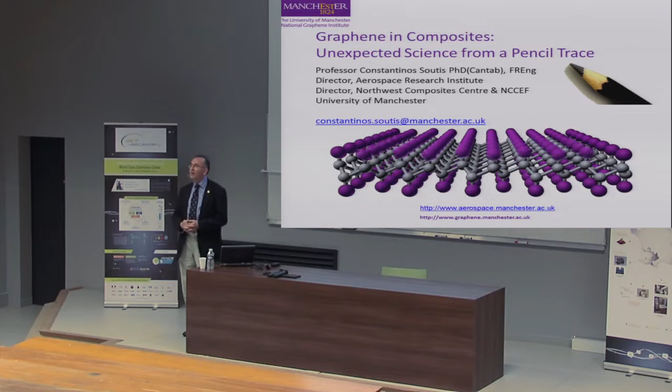Before I talk about graphene, I would say a few things about the talk outline. I'll say a few things about the University of Manchester, who we are, and then talk about graphene at Manchester, and possible applications of graphene in the aerospace sector, but also in other sectors outside the aerospace industry. If I talk too fast, you can tell me to slow down. You can interrupt during the presentation, or we can take questions at the end of the seminar.

We are the largest single-site university in the UK, with a history going back to 1824. Some key facts: we have about 40,000 students, 10,000 staff, and 25 Nobel Prizes over the history of the university. It is the birthplace of the Industrial Revolution, and the atom was split at the University of Manchester, not Cambridge, as they claim. The first programmable computer was developed at the University of Manchester. Currently, eight of current world leaders, 4 prime ministers and 4 presidents, are graduates of the University of Manchester. Only Oxford has 9.

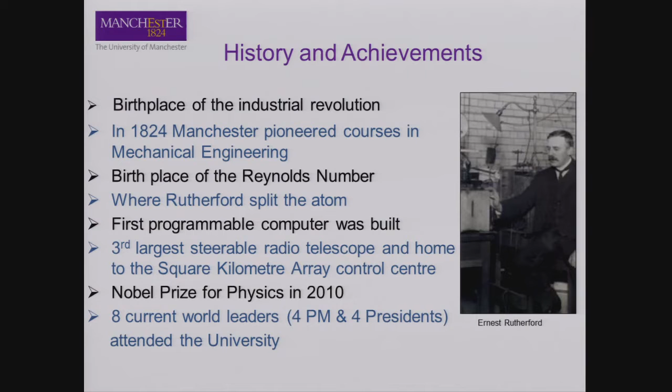Graphene is another thing that has been made in Manchester. It is the largest single graphene research group with over 200 researchers, and a total income over the last 4 years of 170 million pounds. You can convert that into euros. It brings together a very multidisciplinary institute of mathematicians, physicists, material scientists, and engineers.

The National Graphene Institute opened in March 2015, and as I said earlier, it's an opportunity to bring different communities under one umbrella, to tackle problems that are multidisciplinary by their nature. Aerospace is one of those multidisciplinary areas where you need the chemist to look at the polymer, the physicist to understand the microstructures, the material scientist, but at the end of the day, the engineer who is going to build and identify applications where those new material systems can be really exploited.

So the National Graphene Institute is led by academics, and it provides an opportunity to demonstrate new concepts, new applications, demonstrate the potential of graphene by producing new products, and assist in the development of low-cost and scalable manufacturing methods for high-quality graphene. Because today, you might go on Google and say, I would like to order 1 kilogram of graphene. The big question remains how pure that graphene is. What do you know about its purity?

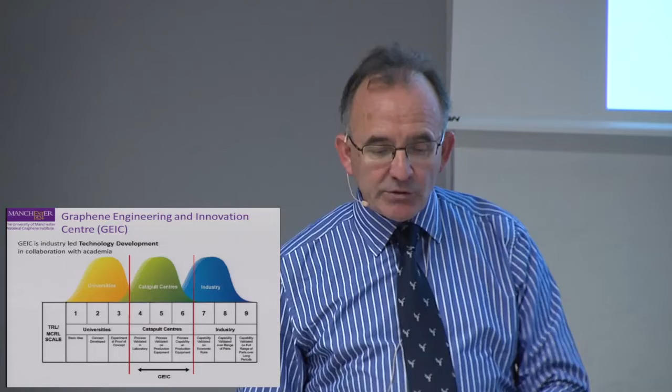In addition to the NGI, we have the Graphene Engineering and Innovation Center, which is another 100 million euros activity, led by industry in collaboration with academics. In this case, the focus is at higher TRLs, so we're talking about 4 to 6, which is probably similar to the TRLs that you're examining under the IRT.

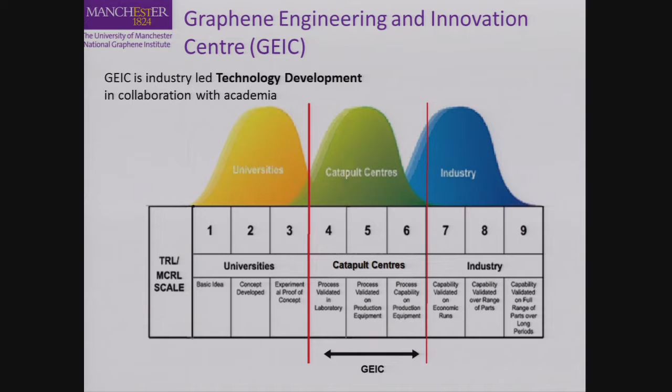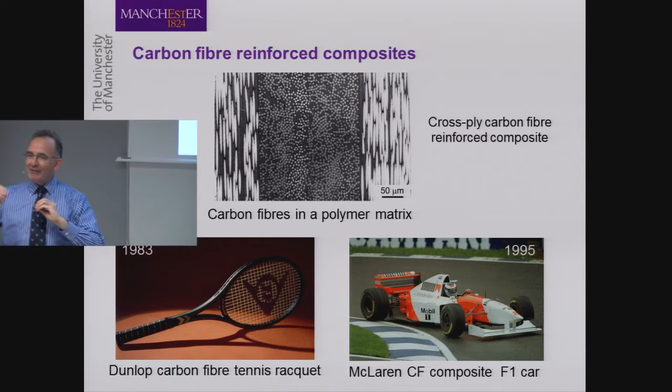We can see some of the earlier applications of carbon fiber reinforced plastics go back to 1983 with the tennis racket, and a bit later on in 1995 with the McLaren Formula One car. Although carbon fiber epoxy systems have been developed in the late 60s, we've seen the first applications appearing in the early 80s. Airbus introduced composites in their Airbus A300 in the late 70s, early 80s in the form of control surfaces, mainly glass reinforced plastic. But composites became more popular in the early 80s onwards. So you can imagine now, if we bring in graphene into composites, it's going to take a bit longer to identify those applications.

If we look at the application of composite materials in the Airbus aircraft, we've seen that the usage of the material grew exponentially, where we've reached today in the Airbus A350, more than 50% of the structure is made out of carbon fiber reinforced plastics. The question is, have we reached saturation? Can we build the whole aircraft out of carbon fiber reinforced plastic? And what materials will be used in the next generation of Airbus or Boeing aircraft?

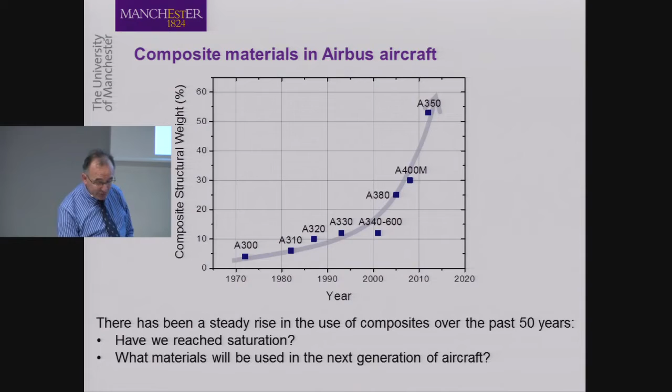We're trying to identify ways to see if graphene can be used in combination with traditional carbon fiber epoxy systems to give us superior properties. Because when we build with composites, we benefit from increased stiffness, strength, and reduced weight, which you need to have a light structure to fly.

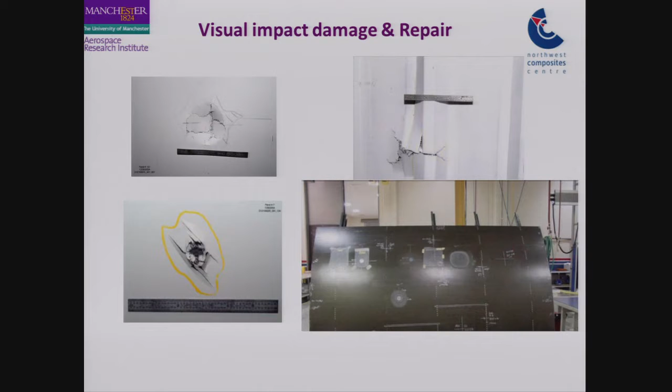But they do get damaged. You drop things, and they behave in a more brittle manner. In this case, we don't need a non-destructive evaluation technique, we don't need an SHM system, because with the naked eye we can see the damage. The challenge is how to fix it, how to repair it. That remains a big challenge for the operator.

But from the graphene point of view, can we use graphene to make our existing composites more resistant to impact damage? Can we use graphene to make current carbon epoxy systems more damage resistant? That would be good, because if we can do that, then we don't have to worry about repairs.

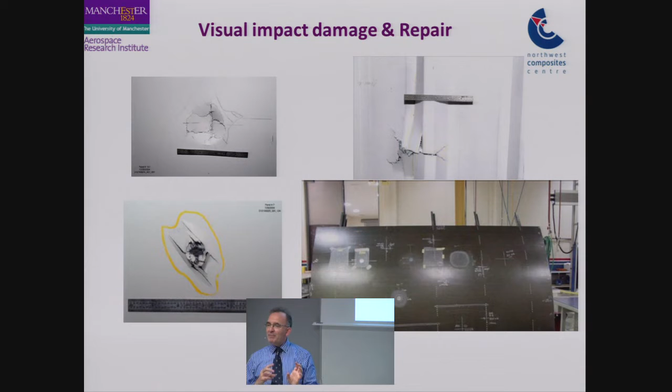Performing a bonded repair in a primary structure remains a big challenge, because the EASA and the FAA don't certify bonded repairs. So if you have damage in the primary structure, you have to drill holes, and your patch has to be riveted.

But what is the problem with rivets? We have to drill the composite. By drilling, we cut fibers, and then we go back to stress concentration factors that we have to deal with in metallic structures. And when we say composites do not fatigue, we know very well now that once we have holes and rivets, fatigue can become an issue, especially as we've moved to an era where our composite structures are becoming primary structures and are heavily loaded, in comparison to composites in the early 80s or late 70s, when they were used mainly as secondary structures.

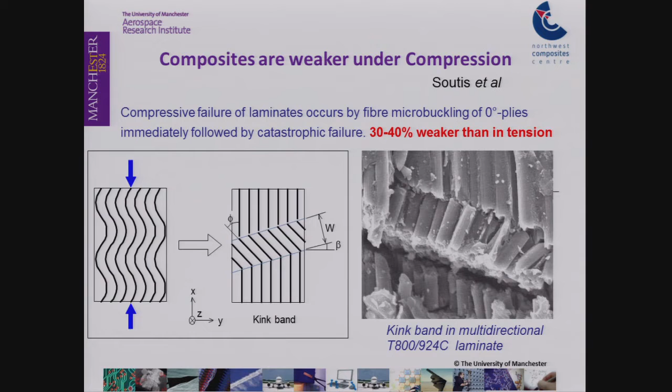And of course, the other big problem we currently have with carbon epoxy systems is that when loaded in compression, the compressive strength is only 60-70% of the equivalent tensile strength. The reason behind it is a huge mismatch in thermal properties between the carbon fiber and the polymer. The coefficient of thermal expansion of your resin is about 70 to 80 microstrains per degree Celsius, while the coefficient of thermal expansion of your carbon fiber is -5 microstrains per degree Celsius.

So during the curing process, you develop thermal strains high enough to distort your fibers. Your carbon fiber, with a diameter in the region of 6 micrometers, becomes wavy. When the structure is loaded in tension, the wavy fibers become straight. But when loaded in compression, the wavy fibers fail by fiber microbuckling, a fiber instability failure mode that takes place at the fiber level. Although the structural engineer has designed the structure to avoid Euler buckling, you can still fail in the form of fiber microbuckling, which reduces the strength by up to 40%.

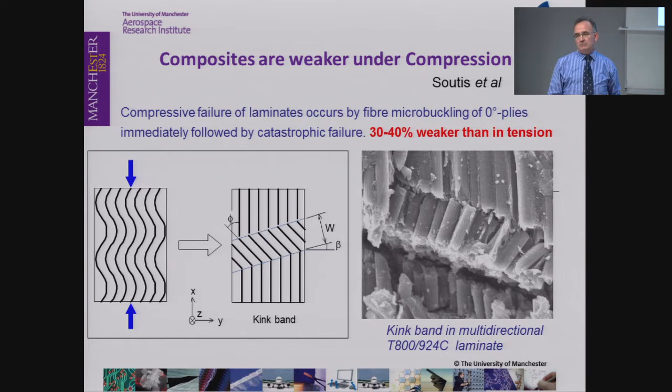So we've seen a potential for graphene to be used in carbon epoxy systems, where we can improve strength, stiffness, and toughness. We can make the composite more damage resistant. And when damage eventually does happen, we can probably tolerate that damage, so we can design more damage tolerant structures.

And moving away from just mechanical properties, can we use graphene to introduce electrical functionality? Can we increase the electrical conductivity of the carbon epoxy system so that when our aircraft is exposed to a lightning strike, it doesn't get damaged, and behaves like a metallic airframe? Can we do that? Or can we use graphene to improve the thermal conductivity of the composite?

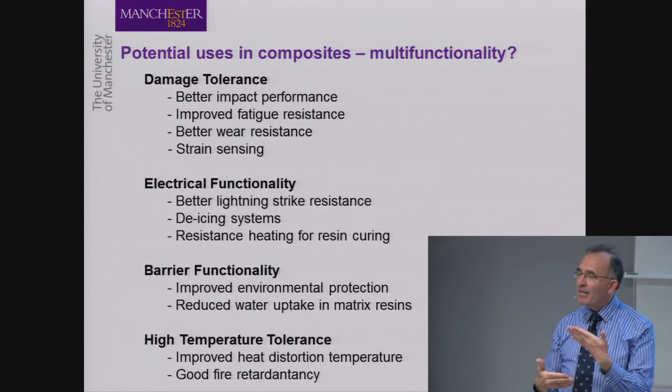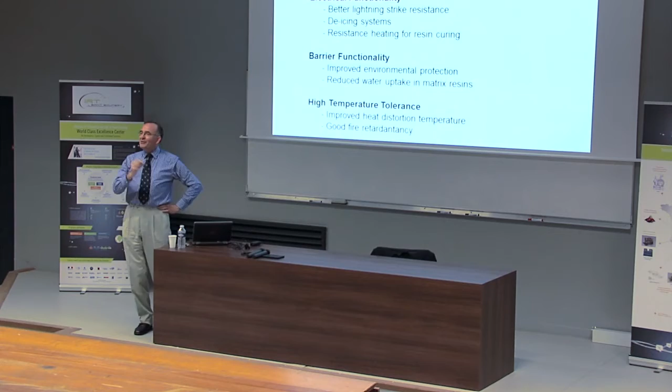So as you can see, there are options where graphene can introduce some kind of multifunctionality in our carbon epoxy systems, which are used extensively by the aircraft, sports, and automotive industries. But of course, the aircraft industry remains the sector that actually invests and drives technology. They set all the challenges we face today. Because after all, yes, Formula One uses carbon fiber reinforced plastic, but if you go to Formula One to ask for research funding, they're not interested in research. They would like to use existing research.

But then, of course, the question becomes, what is graphene? What do we know about graphene? And how new is this super material?

Graphene is defined as a two-dimensional material. It's an allotrope of carbon, one atom thick, which is 0.33 nanometers in thickness. It's accepted that up to 10 layers of graphene is still considered graphene. But then, of course, we are familiar with 0D, the bucky balls. Carbon nanotubes are one-dimensional graphene. And the three-dimensional product, of course, is graphite, from which we can extract and produce graphene.

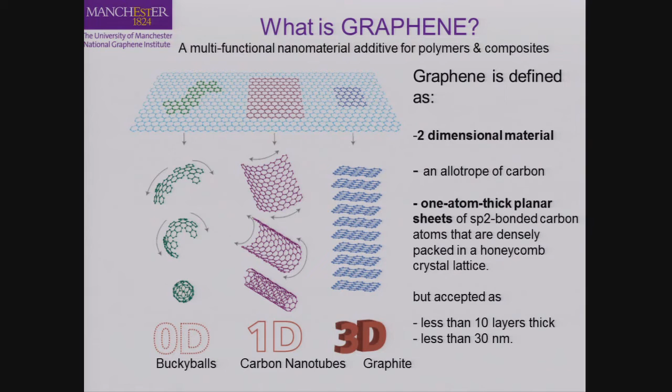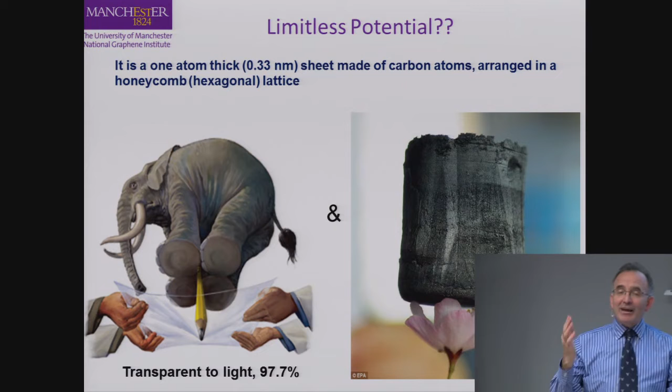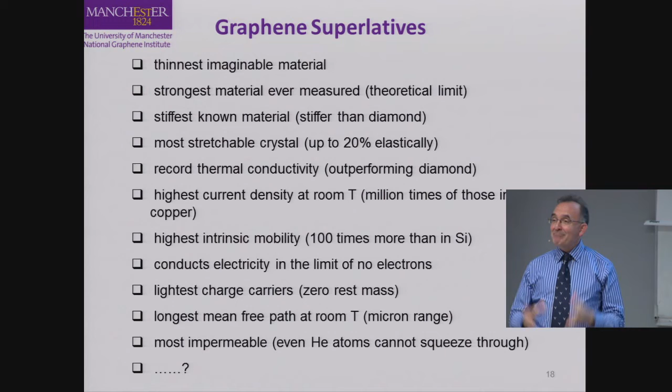And of course, people talk about the limitless potential, the high strength, the super light weight. It's 97.7% transparent. In addition to super stiff, super strong, super light, there is another huge list of graphene superlatives, I call them, that give you the impression they can solve all the problems we face today - thermal conductivity, electrical conductivity, and so on and so forth. This is a very long list of properties that define this material as a super material.

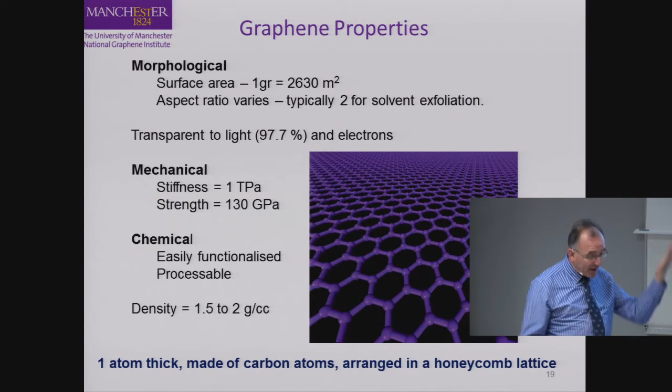And if we look at some properties like stiffness, it's in the region of 1 terapascal. And if we look at strength, it's 130 gigapascals. While if you compare the stiffness of currently used carbon fiber systems, the stiffness of carbon fiber is in the region of 250, 300 gigapascals, while here we're talking about 1,000 plus gigapascals. And if we look at the strength, it's in the region of 2.53 gigapascals, while here we're talking about the strength of 130 gigapascals.

How can we measure those properties? It's not easy. First of all, you need to have the graphene flake. Second, you need to develop the test methods and the measuring equipment, the strain gauges, to measure stress and strain in order to calculate stiffness and to capture the entire stress-strain response.

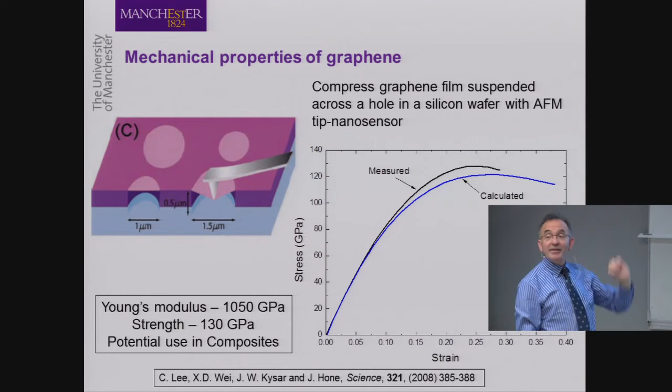We can see here an example where you have this cantilever beam with an AFM tip nanosensor to measure the strain developed on that graphene flake. And from the stress-strain curve, we can see that we have a very high strength of 130 gigapascals and a Young's modulus of 1,050 gigapascals.

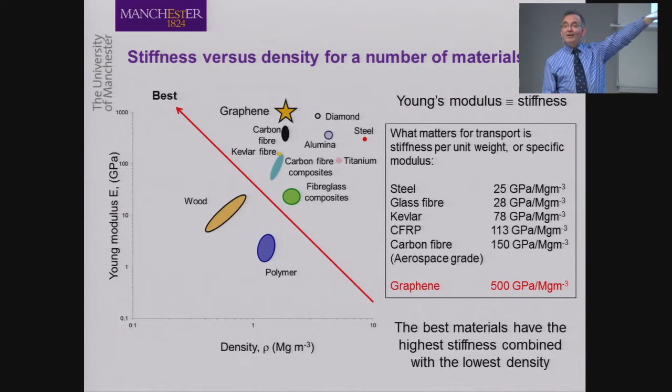And then when we look at the comparison of graphene with other traditional materials, we can see that graphene is at the top left corner with very high stiffness and very low density. So you can see where the traditional carbon fiber is much lower. And of course, if we look at steel, it's got a specific stiffness of 25 units compared to 500 units for the graphene. So it is a super material.

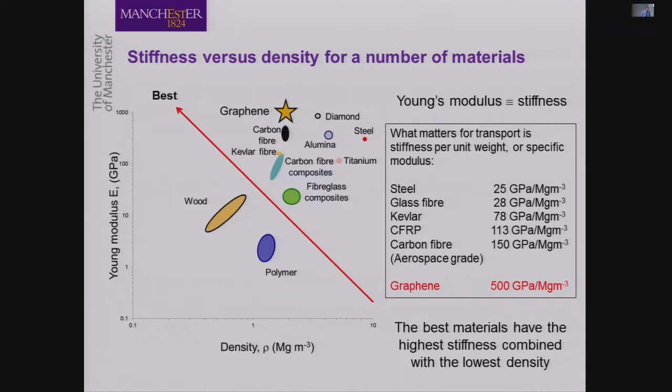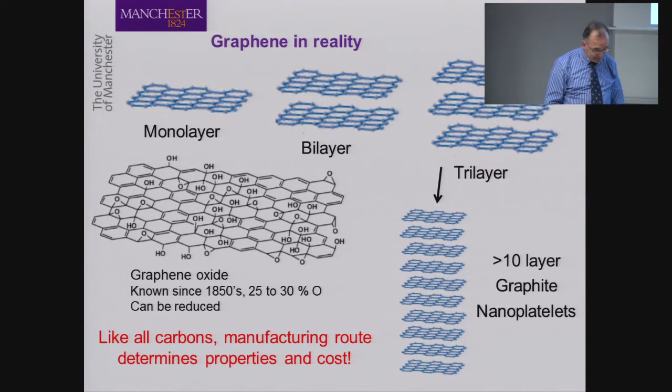And as we said at the beginning of the talk, there is graphene and its derivatives. So we have graphene here produced with CVD, Chemical Vapour Deposition. Then we have graphite, reduced graphene oxide, graphene oxide, and graphite oxide. So when you go out to buy some graphene, what do you buy? Do you buy pure graphene, or do they give you some graphene oxide? Or they might give you graphite oxide, which is going to have completely different behavior and different properties from the pure graphene.

Of course, the next challenge we have is how do we make graphene? One way to make graphene is we can start with a top-down method where we have a block of graphite and we try to break away layers of graphene. Or we can go from bottom up, where we can build graphene atom by atom. And there are these two different techniques that can give you graphene.

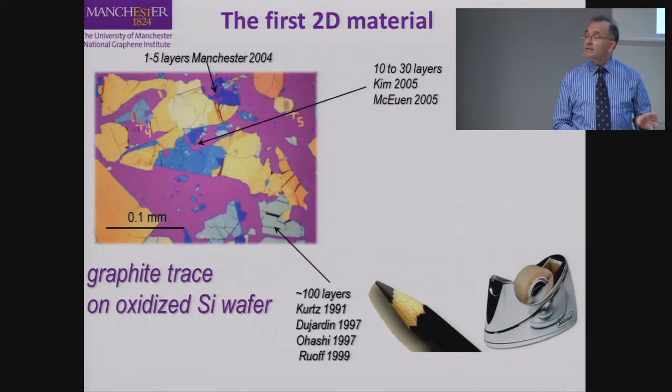If we look at this graphite trace on the oxidized silicon wafer, they went to one small spot, a tiny spot - that's a small spot there, probably a pencil spot. And then if you magnify that, there you are, that's your first flake. That's the first 2D material, which was demonstrated by the colleagues at the University of Manchester.

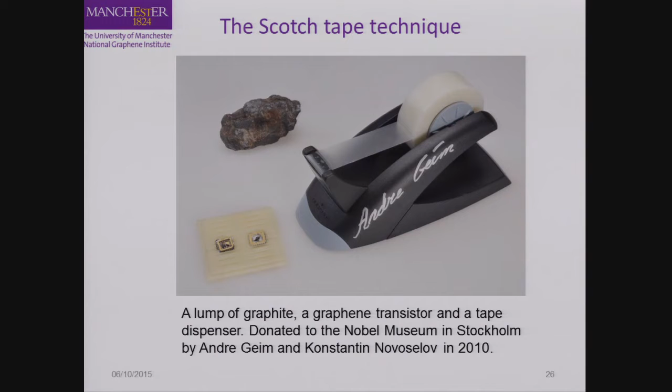And of course, you can produce your own graphene using the Scotch tape exfoliation technique. So next time you go to Stockholm, at the museum, you're going to see a lump of graphite, the Scotch tape, and also they have donated a graphene transistor. They're on display at the Nobel Museum in Stockholm.

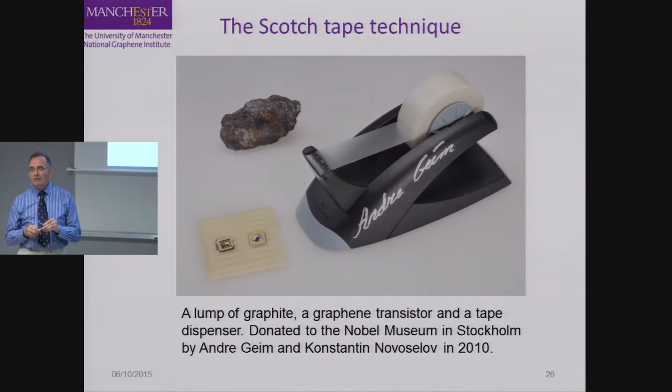I have some pencils here, of course, from Manchester that you can use with your own Scotch tape to produce your own graphene. But my pencil is more multifunctional, because it can also fly. So I can give one to your CEO there - you can catch that, there you are. Enjoy flying.

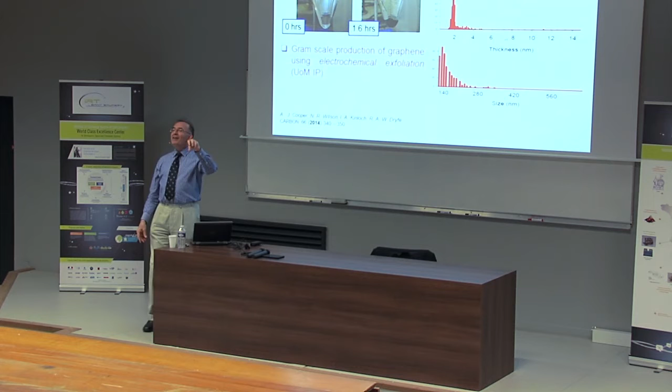So if we go now to graphene production, we've seen that one method is electrochemical exfoliation, not as simple as the Scotch tape, of course, but more complicated. The University of Manchester has the IP for this electrochemical exfoliation, where we can produce pure graphene with those super properties we've seen earlier.

The problem we have is that we can produce only a few grams, because after all we're a university, we're not an industry. And this is where the National Graphene Institute and the Engineering Graphene Centre can work closely with industry and take those concepts, and probably next time they can give us, instead of a few grams, a few kilograms.

And at the moment, we produce few graphene flakes. They are few layers thick, small sizes - you can see the distribution of size, anything between 140 to 300 nanometers, and the thickness around 2 nanometers or less, or slightly more, a few layers.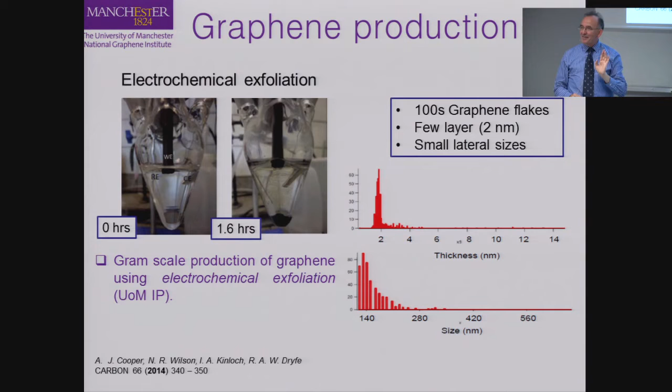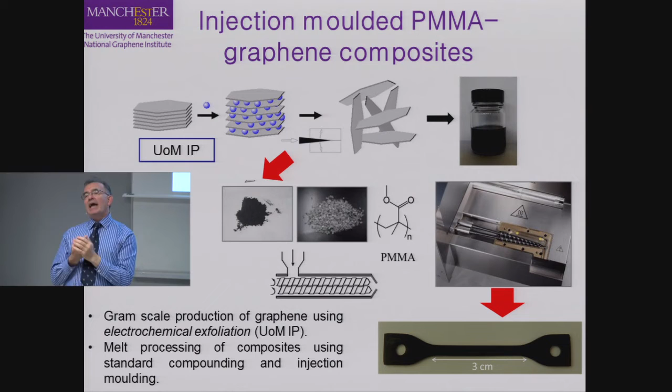And then what can you do with those grams of graphene? As we said earlier, we can modify plastics. In this case, we can modify a thermoplastic with the ultimate aim to improve strength, stiffness, toughness. But then again, I wouldn't waste my graphene to improve the mechanical properties of PMMA - why would I do that? Even if I double or triple or quadruple my stiffness, I still can't really build an aircraft with that kind of material.

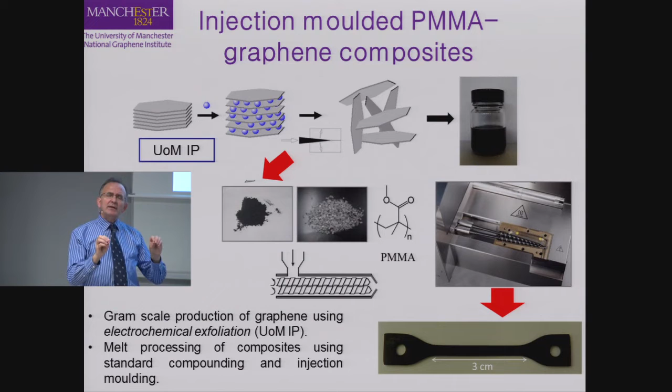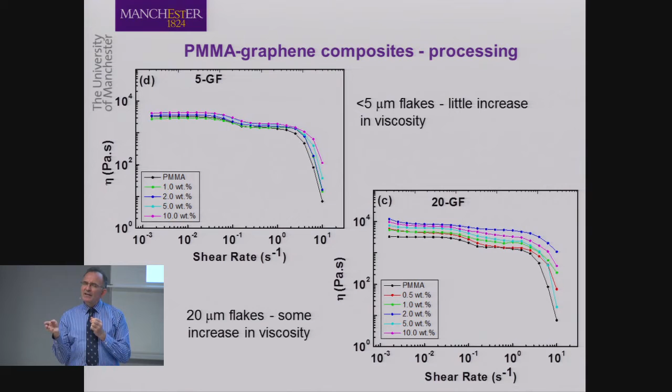But it's to demonstrate how you can mix it, because the mixing and distribution of graphene has a huge impact on the properties you will achieve in your final product. And also you want to demonstrate that as you increase the amount of graphene, you don't alter viscosity.

We can see in the top left graph, if we have 5 micrometer graphene flakes, as we increase the amount of graphene from 1% to 10% by weight, we don't alter the viscosity. If our graphene is of a larger size, 20 microns, then we can see as you increase the amount of graphene in your polymer, you change the viscosity, which means it's going to have an effect on your manufacturing process.

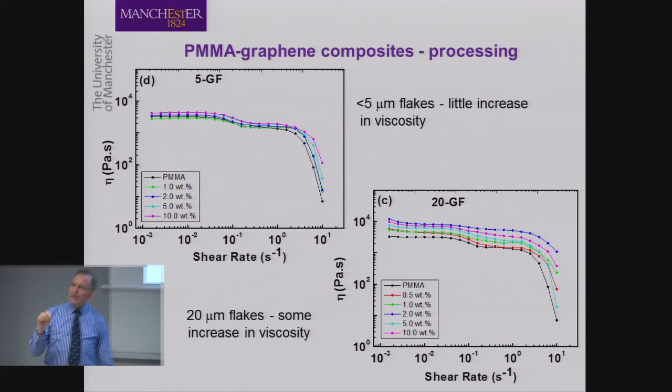And then if your thermoplastic is reinforced with continuous fibers, maybe the effect or benefit you get from graphene is not really felt as much. So these are critical issues on how we can mix and disperse the graphene uniformly in our matrix.

And if we look at the Young's modulus, we can see that from 2.4 gigapascals, we have increased it. In percentage terms, it's a very high increase, but in actual terms, what am I going to do with 3 gigapascals stiffness? Maybe people in the electronics industry or other sectors will say this is a very significant increase and I will benefit from that. But from the aerospace application, I cannot build anything with that.

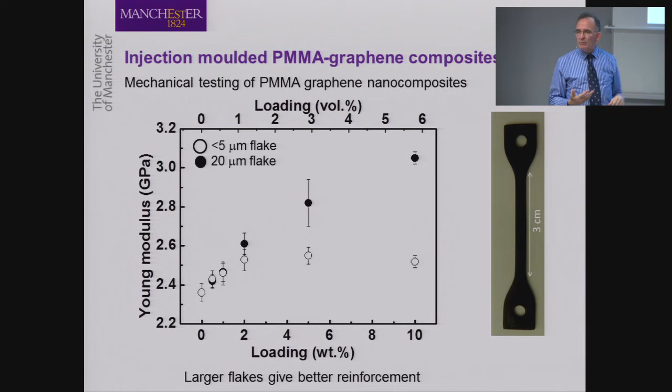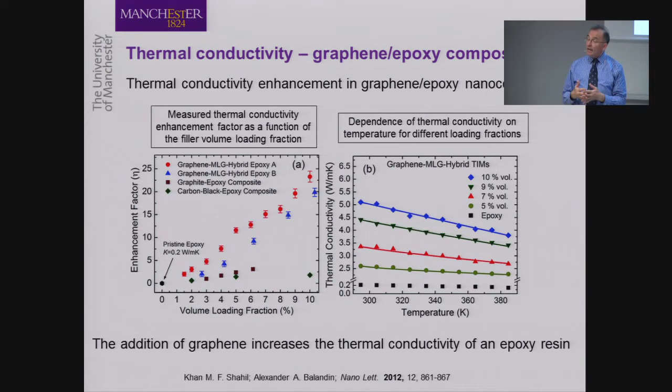Now, if we look at other properties outside mechanical response and behavior, if we look at thermal conductivity, we're going to see that we can increase the thermal conductivity dramatically. That is beneficial, especially in the aircraft industry, where we would like to do something about heat management and how we can dissipate heat quickly in a non-metallic structure. So there we can see straight away a huge benefit by modifying the thermal properties of our component. And you need appropriate equipment to make those measurements for thermal conductivity.

The other significant property we mentioned at the beginning of the talk is electrical conductivity. If we look at thermosets or thermoplastics, they are not electrically conductive - they resist electrical flow. But if we introduce 2% by volume graphene, then we can see that the electrical conductivity increases by 12 orders.

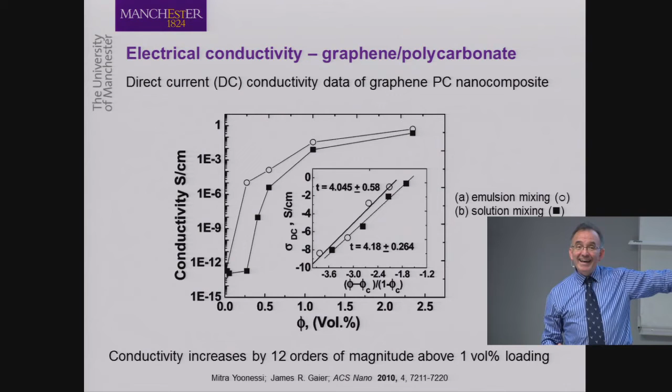That is a significant improvement. Of course, someone might say the electrical conductivity of copper is 10 to the power of 7 Siemens per meter, which then again, I'm far, far away from that conductivity of copper. Now, the conductivity of the pure graphene flake on its own is similar to copper, but when you mix it with the polymer, obviously it's much lower, but still 12 orders higher than the monolithic polymer.

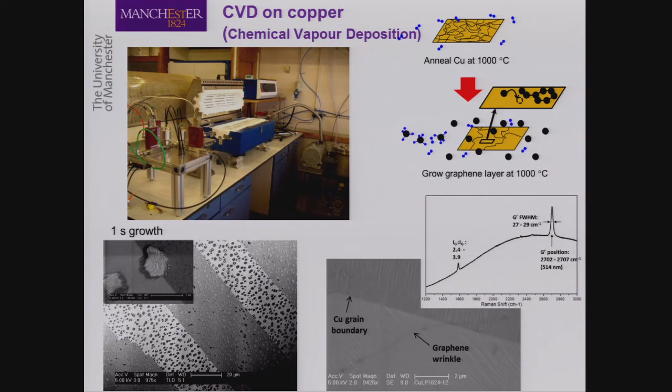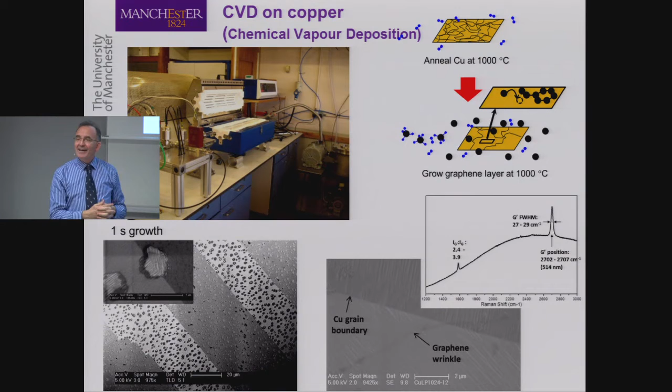Another way of producing graphene is by chemical vapor deposition. We can see there, atom by atom, we create the layers of graphene. You grow graphene on your copper substrate at elevated temperatures of about 1,000 degrees Celsius. Again, there is an IP behind this, because it's not as simplified as it appears on the screen.

If you go at the small scale level, then with those graphene flakes, you can develop strain gauges. So you have straight away an application of graphene strain gauges for your applications in microelectronics and many other industries, where when you measure strains, they are in few microstrains rather than the thousands of microstrains that we experience in structural applications in the aerospace.

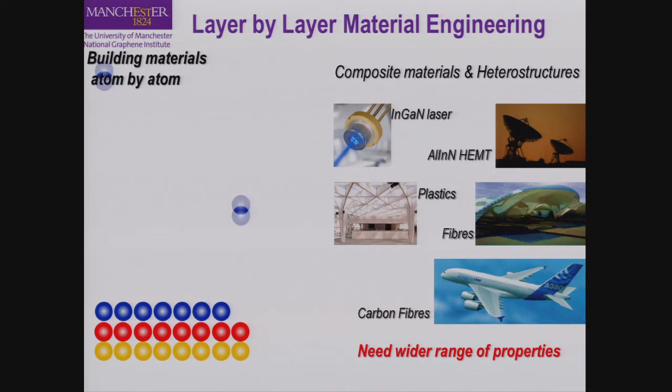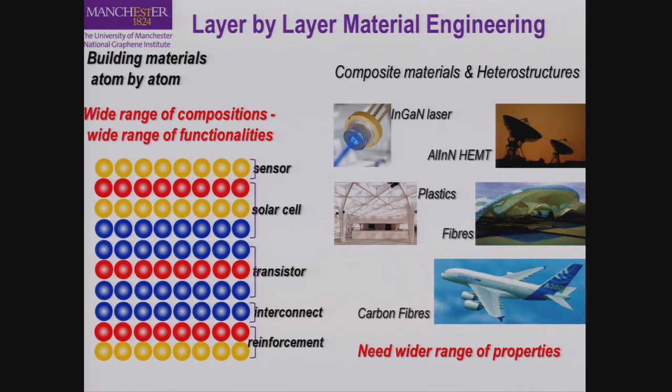Of course, the advantage with graphene is the opportunity to build multifunctional composites, where certain layers in our multi-layered composite construction can be responsible for providing the strength, the stiffness, the optimized toughness, the heat storage or dissipation, or they can act as sensors to detect damage in the composite structure when it goes into service. So they can sense impact events.

So when the aircraft mechanic walks along the aircraft composite wing and drops the spanner, the graphene can act as a sensor to report the impact event that took place. Here we have a multi-layered construction where it has been optimized for different functions. So we have a multi-layered, multifunctional composite structure.

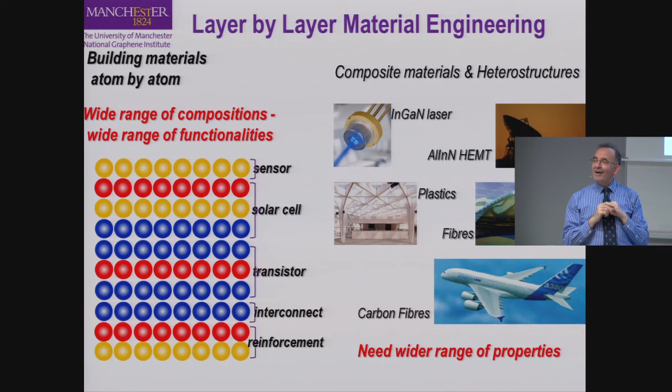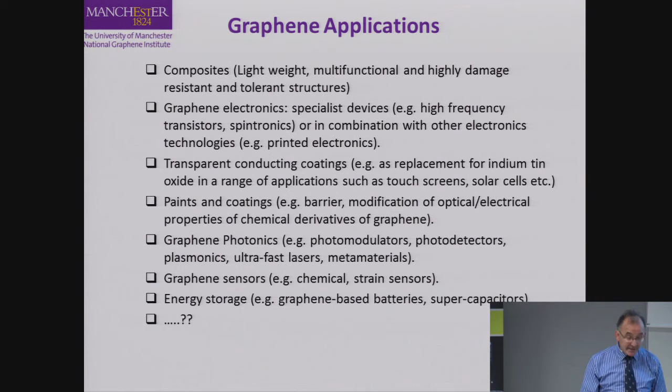And then people ask me about applications. Already we mentioned applications where we can modify mechanical properties in our polymer. We can modify thermal properties, electrical properties, but also we can build things. We can look at electronics, special coatings. We can look at photonics, graphene sensors.

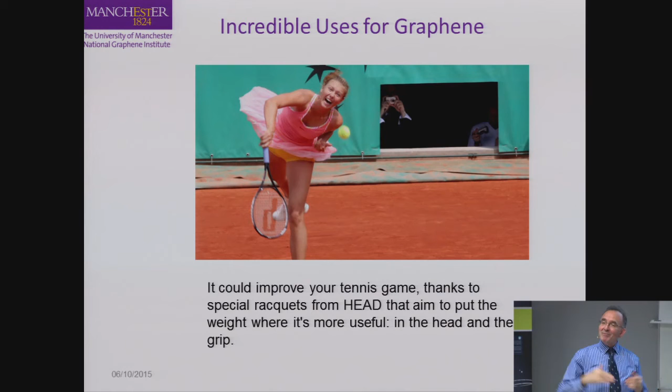Another application: if you look at your iPhone, people usually drop them and the screen shatters. If you can replace the screen with a cheap plastic coated with graphene, then it doesn't matter how many times you drop your phone, it's going to be unbreakable. Question mark.

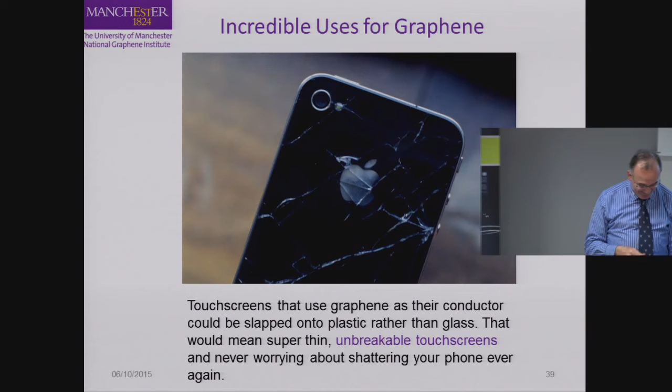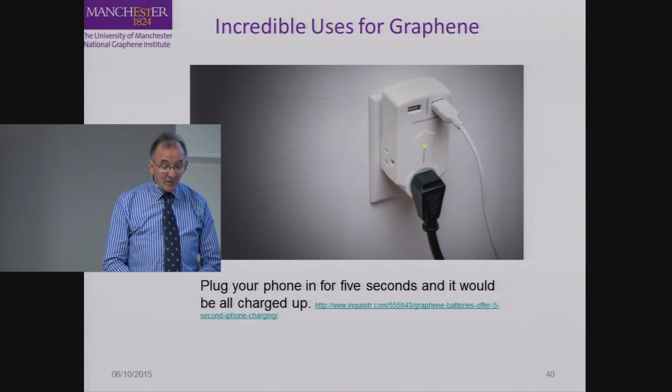You can use graphene maybe to develop the next generation of graphene charger, so you can charge your iPhone in a few seconds. You can upload data in a few seconds because you remember that graphene flake provides no resistance to the flow of electrons.

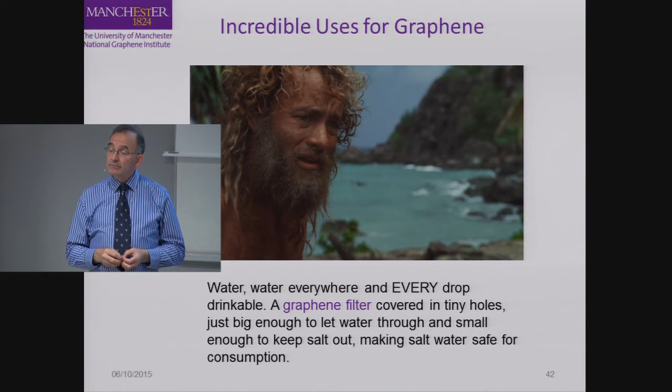I like this one, graphene filters, where the filter allows the water to go through, but it arrests the salt, so it purifies seawater.

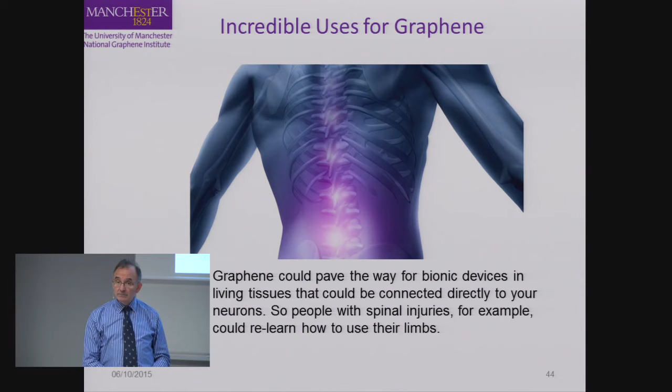3D printing of graphene composites - if you look currently at 3D printing, it's all monolithic materials with no reinforcement. Maybe this is an area where actually graphene can be applied more easily.

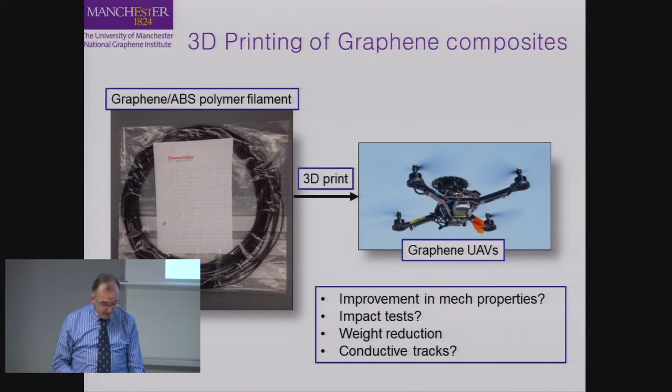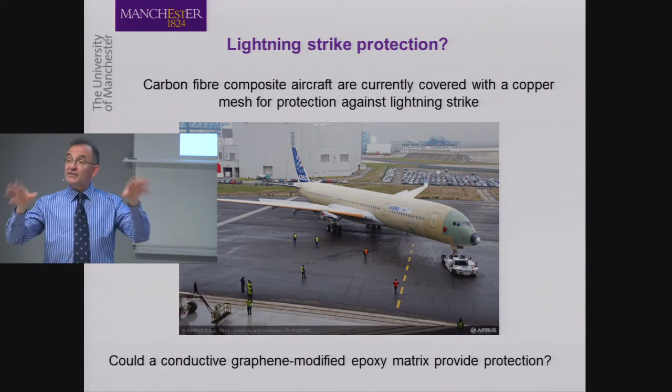We spoke about lightning strike protection, and we spoke about coatings. But then again, this is a more difficult application, more difficult to really accomplish and achieve. If we look currently at composite airframes, like the Airbus A350 and the Boeing 787, in order to protect the aircraft from a lightning strike, it is covered by a chicken wire - a wire mesh that puts additional load on the aircraft.

And if you go back to the earlier impact damage where the composite airframe has been damaged and needs to be repaired, now, in addition to repairing the airframe, you have to make sure that you have repaired also the protection of the aircraft. So the question remains, could a conductive graphene modified epoxy matrix provide protection? Maybe not today, but I don't know. Maybe something that can happen in the near future.

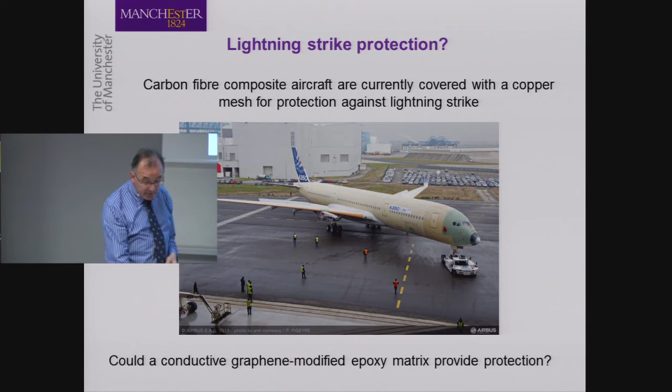So some conclusions. We have seen that carbon fiber epoxy systems are used extensively in the aircraft industry. 53% of the Airbus A350 is CFRP.

We've seen that graphene could be introduced into composites to modify not only the mechanical properties and the resistance to damage and the damage tolerance, but also the thermal aspect, the electrical aspect.

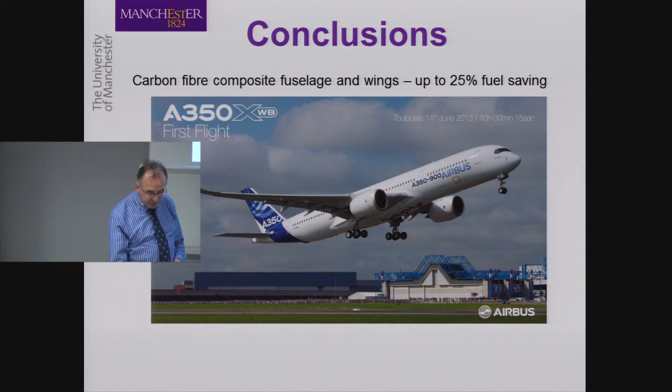But then again, the aircraft industry is a very conservative industry, and it can take a long time before new materials become widely used. And always, for very good reasons, the certification of new materials can take many years.

But maybe this is an area where institutions like the IRT and our institutions in Manchester can convince the certification authorities that we have developed the appropriate mathematical models that can reduce the amount of mechanical testing, to give them confidence and trust our designs without breaking so many coupons, sub-elements, elements, components, substructures, and the whole structure.

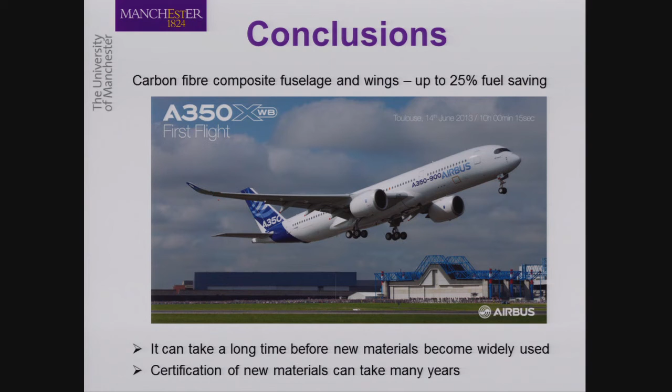In the aircraft sector or any other sectors of our economy - it can be the marine, the automotive, space, sports industry, bioengineering, you name it.

So, another question: graphene composites, is that the future? Maybe. Already we've seen practical applications, engineering applications, commercial applications.

And you've seen again the Formula One - they're very keen to introduce parts in a Formula One car that contain an amount of graphene.

But we have all these barriers and challenges to deal with. First of all, the first one is to burst that hype bubble. Yes, graphene is a super material, but we have to be careful with what we can achieve - in the short term, in the medium term, and in the long term.

We have to think about the manufacturing of graphene. Can we reproduce it? Can we produce enough quantity to use in our structural applications?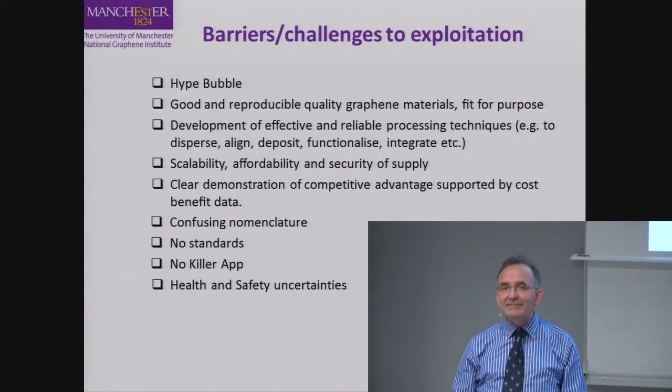Because, yes, you might introduce new sensors, new devices that can be implanted. But before we implant them into our body, we have to make sure that there is no interaction, or chemical interaction, or health aspect.

So, to finalize then, the National Graphene Institute and the Graphene Institute in Manchester provide an opportunity for collaboration - an opportunity of collaboration with industry, but also universities and other institutions.

It provides access to personnel and equipment that can be used to investigate aspects of graphene, and also can assist how the concepts we develop at our centers can be smoothly transferred to industry, where their

job is entirely to produce new products that are more efficient, more advanced, more reliable, and our industry can be more competitive and survive in the long term.